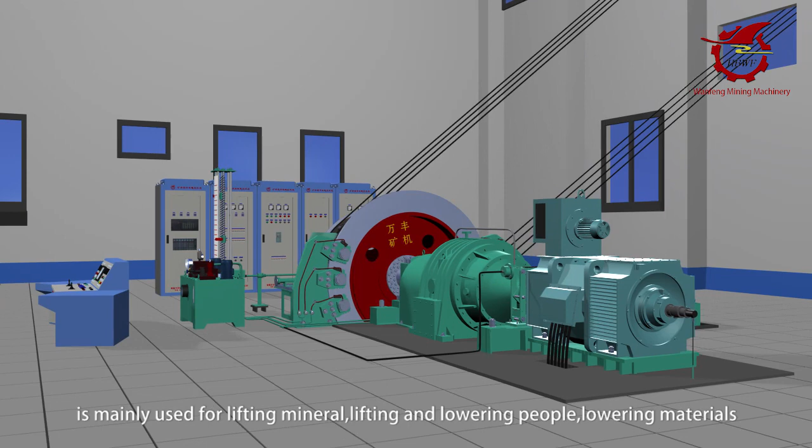JKMD floor type multi-rope friction mining hoist is mainly used for lifting mineral, lifting and lowering people, lowering materials and equipment in vertical shafts of coal, non-ferrous metal, black metal, non-metal, and chemical mines.

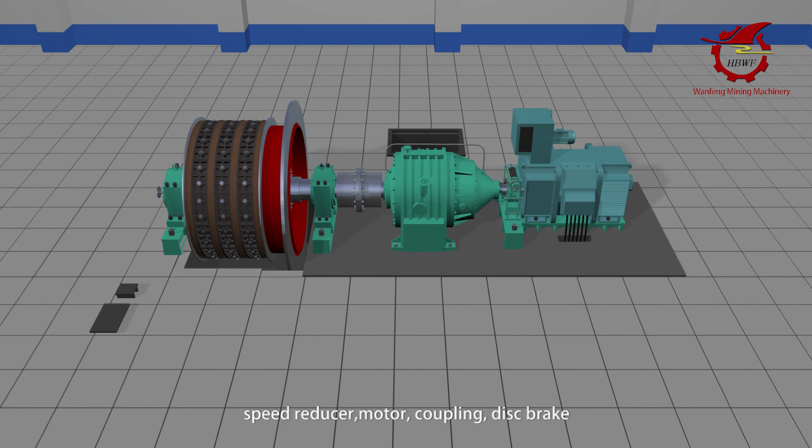The multi-rope friction mine hoist is mainly composed of main spindle device, speed reducer, motor, coupling, disc brake, hydraulic station, lubrication station, depth indicator, speed detector, wire rope device, rope adjusting device, operation desk, electric control cabinet, hoisting sheave device, and other parts. Multi-rope friction mine hoist working power can come from the motor device.

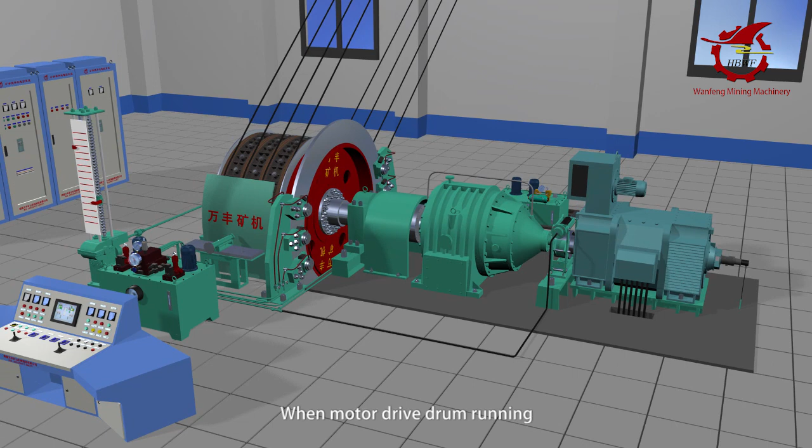When the motor drives the drum running, the 4 wire ropes on the friction liner can move synchronously with the drum, which can make the container lift and lower in the mine shaft through a series of electrical, mechanical, hydraulic control and protection systems to ensure the safe operation of the machine.

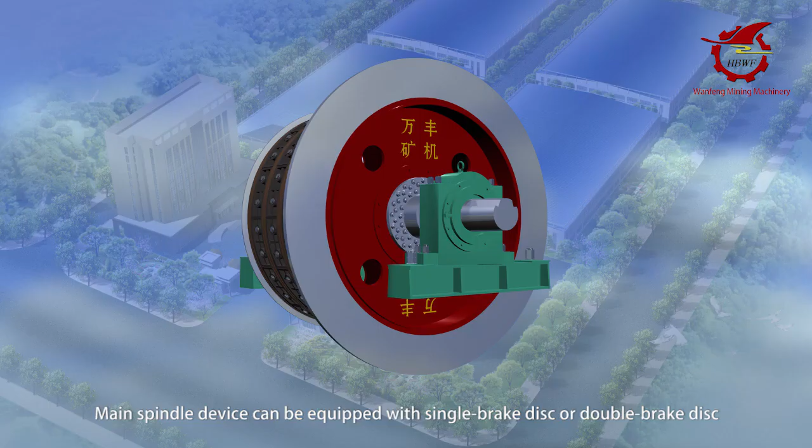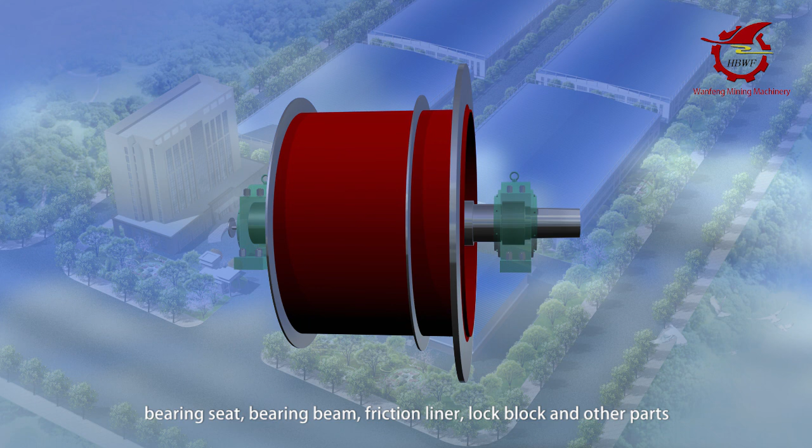Main spindle device can be equipped with single brake disc or double brake disc. It is composed of main spindle, hub, friction pulley, brake disc, bearing seat, bearing beam, friction liner, lock block, and other parts. The friction pulley uses wholly welded structure to ensure enough intensity and stiffness.

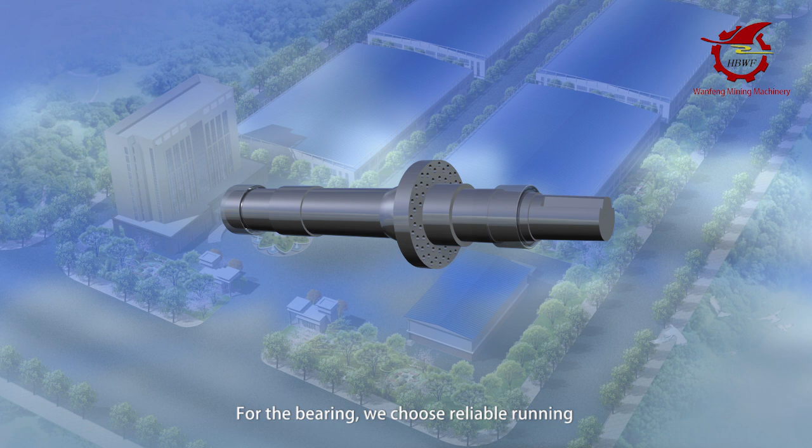The spindle adopts number 45 forged steel and is formed from normalizing, heat treatment, and finishing. For the bearing, we choose reliable running and low maintenance double-row self-aligning spherical roller bearing.

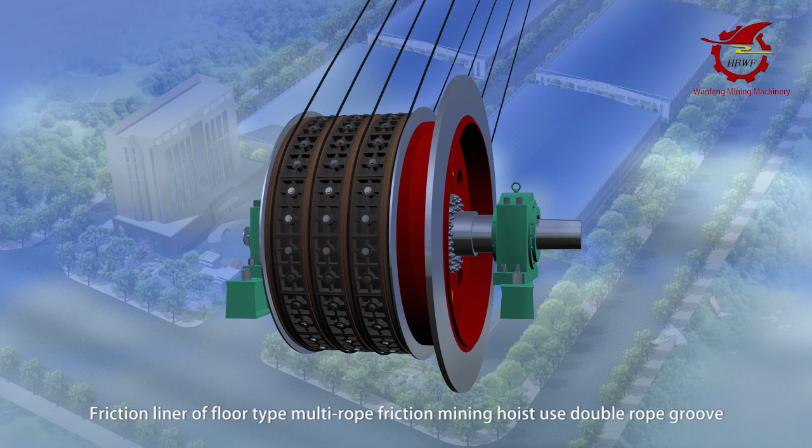The friction liner of the floor-type multi-rope friction mining hoist uses a double-rope groove. Its material is GM3 high-performance material and it is equipped with a rope adjusting device.

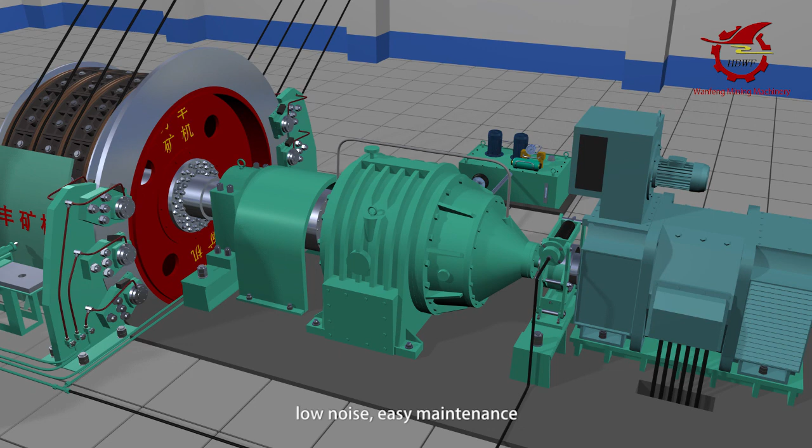The speed reducer adopts a Planet Gear speed reducer. It has long service life, high transmission efficiency, small size, lightweight, low noise, easy maintenance, and is equipped with a double pump system lubrication station, by oil splashing, and forced oil thinning lubricating to ensure the gear speed reducer works smoothly.

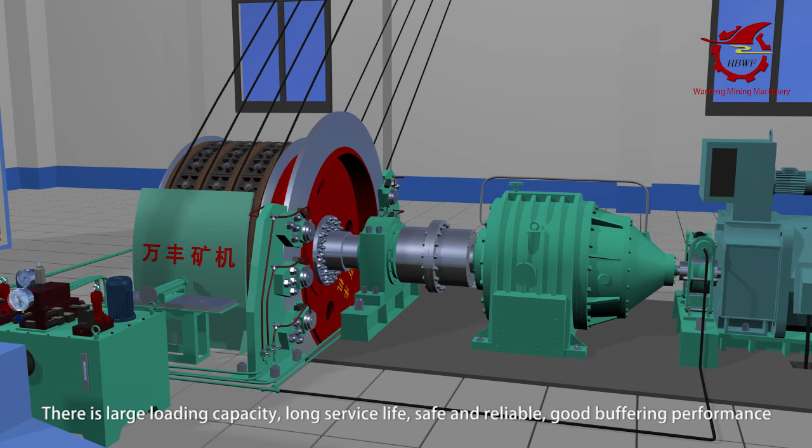It has large loading capacity, long service life, and is safe and reliable. A good buffering performance gear type coupling connects the main spindle and speed reducer, while an elastic pin coupling links the speed reducer and motor, which can slow down the shock from starting and stopping of the machine to the motor.

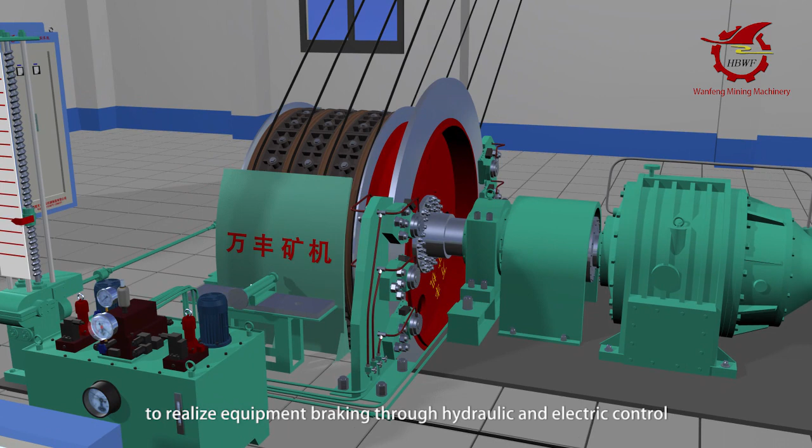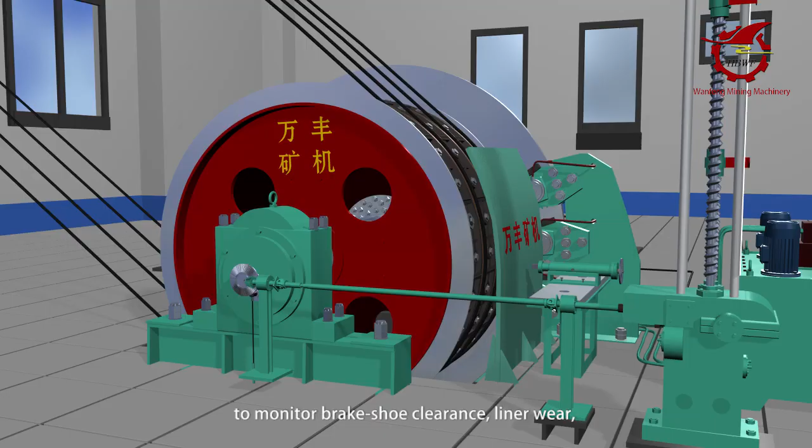The braking device uses a rear oil cylinder structure to realize equipment braking through hydraulic and electric control. It has advantages of rapid response, evenly distributed braking force, and is safe and reliable. The brake is equipped with a protection device for detecting brake shoe wear and spring fatigue to monitor brake shoe clearance and liner wear, and it also has a warning and protecting function.

The main valve parts of the hydraulic station use imported technology. It has advantages of proportional pressure adjustment, electric delay secondary braking function, and 2 sets of hydraulic systems in one station, one set working while the other is standby.

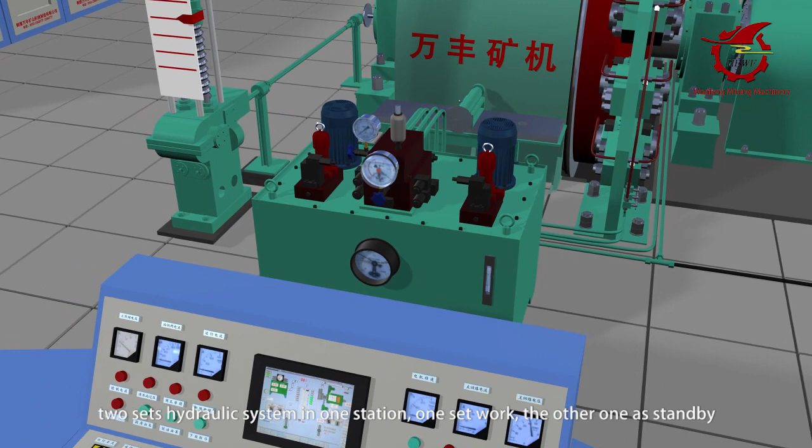Pressure adjustment of the hydraulic system is totally completed by electric control. Delay time from 0 to 10 seconds can be adjusted continuously.

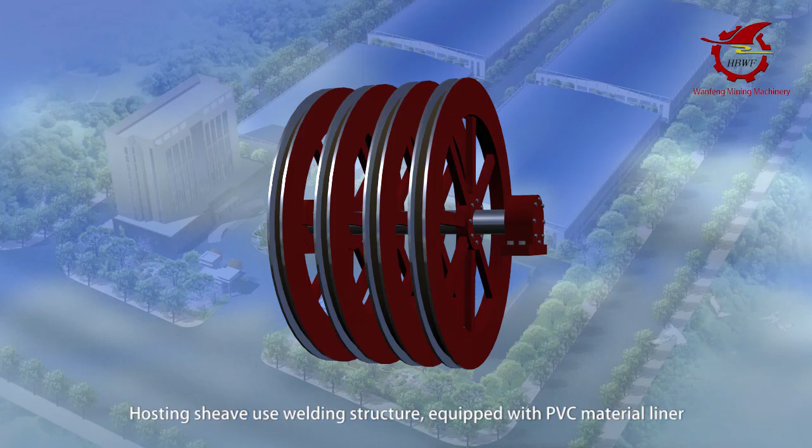The screw rod type depth indicator has a fail-safe feature and position limitation protection function. The hoisting sheave uses a welding structure equipped with a PVC material liner.

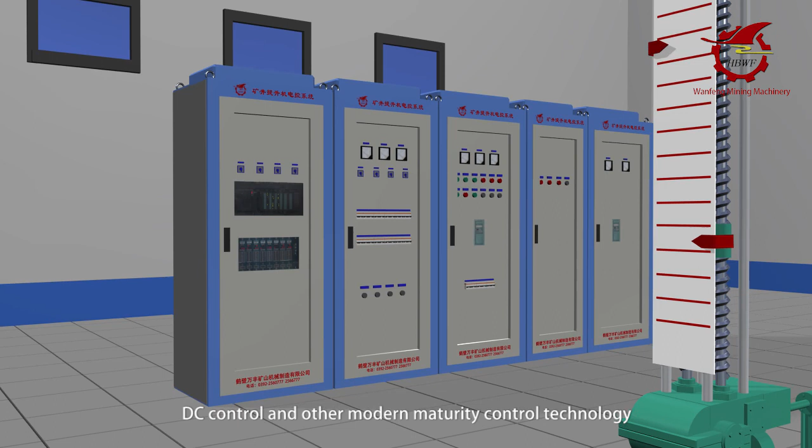Electronic control adopts a programmable digital DC control system, using human-machine interface control, PLC programmable control, DC control, and other modern mature control technologies. It has the features of easy operation, high reliability, perfect protection, strong anti-interference ability, and low maintenance.

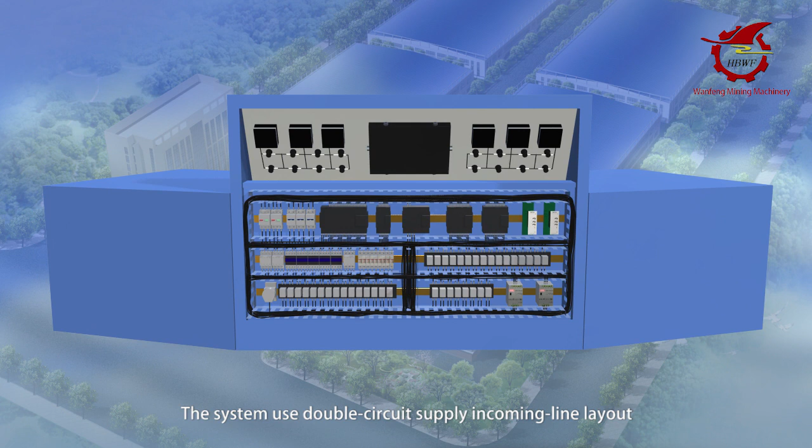The system uses a double circuit supply incoming line layout and has an uninterruptible power supply device to ensure safety and reliability.